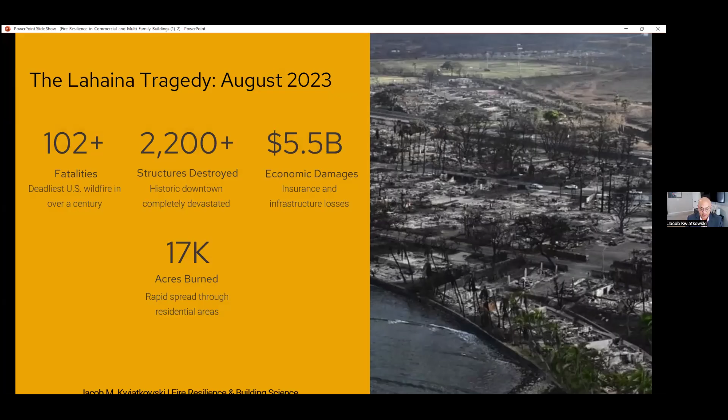One of the big things on that is, more than 90% of those homes were started from embers, and you heard about that in session one, and you're going to hear it a couple of times here in mine as well, because when you're talking about 90% of how a building ignites, that's pretty important. The lesson there in Lahaina is that urban design, material selection, and site planning are as critical to wildfire survival as any fire department is.

And we're going to get into a little bit of topography. I know the IBHS touched on this as well, but I like this particular design because it kind of shows you exactly what the issue was. And topography is big. So when you're looking at site plans for your buildings, it's going to be important. For Lahaina, the reason it burned so fast comes down to the wind and terrain. The town sits in a natural wind tunnel between mountain slopes, and during the fire, winds exceeded 60 miles per hour. The flames didn't chase the buildings, the wind actually carried the fire through them.

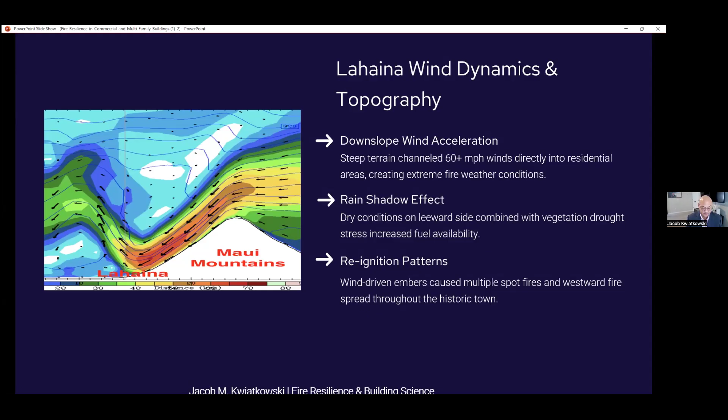Now, for architects in Oregon, you're going to want to pay attention because you have similar topography. Canyon communities in Bend, hillside housing near Ashland, and wind corridors along the Columbia Gorge. Here's a fun fact for you. For every 10-degree increase in slope, the rate of fire spread doubles. Even roof pitches can act like microslopes, drawing heat upward under overhangs. It's something to consider when you're designing the eaves and soffits, and I'm going to touch on that later in the presentation. Let's keep going.

NOAA fire weather mapping. One of the most valuable tools we have is NOAA's fire weather mapping systems. They're open source data sets that anyone in the room can access. They're not just for meteorologists or emergency managers. We use them daily, but they're there for everyone. As an architect, you can use them to make smarter siting and orientation decisions, long before the permitting starts.

Some of the ones that I recommend starting with if you're going to do some research is weather.gov/fire. That's NOAA's National Fire Weather page. It gives you daily red flag warnings, wind forecasts, relative humidity layers. NOAA also has historical model based data on spc.noaa.gov. I'll have links to these at the end so you can play with them. They're free to use. If you're in a pre-planning phase or doing site assessments, it's definitely worth a look.

Another excellent tool is the U.S. Forest Service's Wildfire Risk to Communities portal at wildfirerisk.org. You can type in a zip code or the name of a community, and you can instantly get the risk layers. It'll show you exactly what the wildfire risks are for that area, the slope, the vegetation, and the exposures. It's a really incredible resource when you're advising a client on site selection and master planning. And again, I'll have these at the end of the presentation.

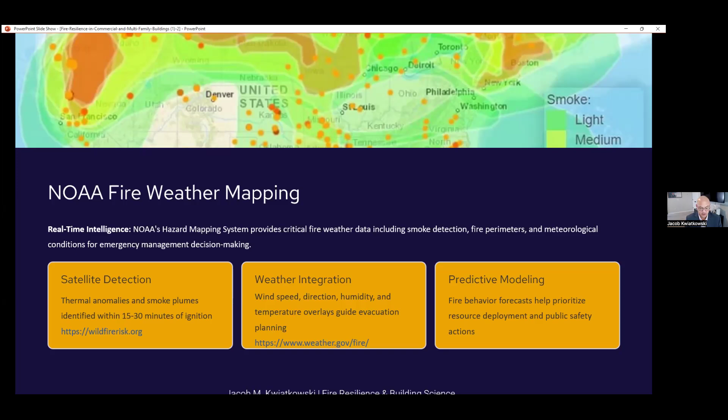And here we're going to go into some more topographical stuff. And again, this is way ahead of when you're going to be building, and this is so important to understand and try to get across. And I know IBHS did some in the last presentation, and I'm just going to keep it going too, because the slopes do matter.

When we talk about wildfire behavior, slope and wind alignment are everything. Heat rises, wind accelerates it, and narrow terrain acts like a nozzle. If a canyon points towards your project, you're designing at the mouth of that nozzle. Because of the topography, it's going to act like a little blowtorch.

It matters in building form, because embers don't care about zoning lines. They exploit every vent, joint, and underside soffit. In some of the California post-fire surveys, we found melted windows on the non-burn side of homes because that heat wrapped around under those eaves. And even though that one side of the home wasn't burned, it's still that heat traveling in that corridor that melted those windows.

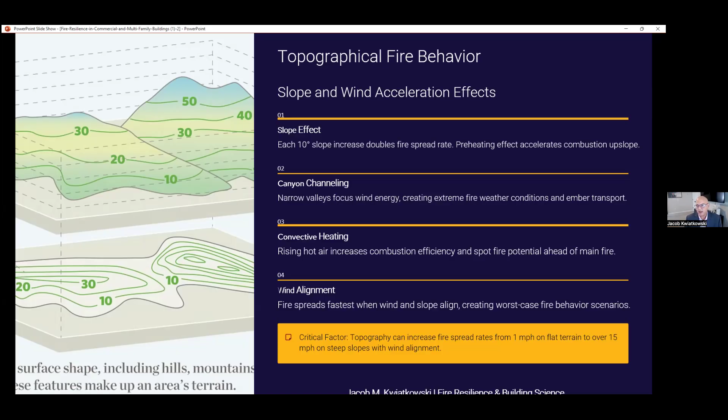So the best way I can put it for architects, and how I've phrased it when I've been working with them as an AHJ, is to think about fire paths the way you think about airflow and ventilation studies. It's the same physics, just with much higher temperatures. So that's just one of the ways I put it to my architects when I'm working with them as an AHJ, and it helps them figure that out.

So the Los Angeles wildfire cluster. You fast forward to 2025 in Los Angeles, we saw 3 simultaneous wildfires threatening multiple urban districts. The firefighters were stretched thin, meaning the first 12 hours, each building was on its own. And that's where passive protection makes the difference. That's where resilience comes into play, sustainability.

If there can't be a response guaranteed in 10 minutes, resilience has to be built into the walls, not just expected from the hydrant, because somebody has to access and get to it. If it's more than 10 minutes, the design of the building is so important. Designing with that mindset, assuming you might be your own first responder, changes how you specify materials, access roads, and defensible zones.

When I'm looking at a house or a building that's going to be designed in a wildfire area, we look at the topography, and we look at the NOAA information that we have, and as a fire marshal, try to help them make the best decision on where this is going to be located. And data is our friend. The IBHS and NOAA are such great resources for us and for you guys, and I highly recommend continuing to use them and utilize what they have to offer.

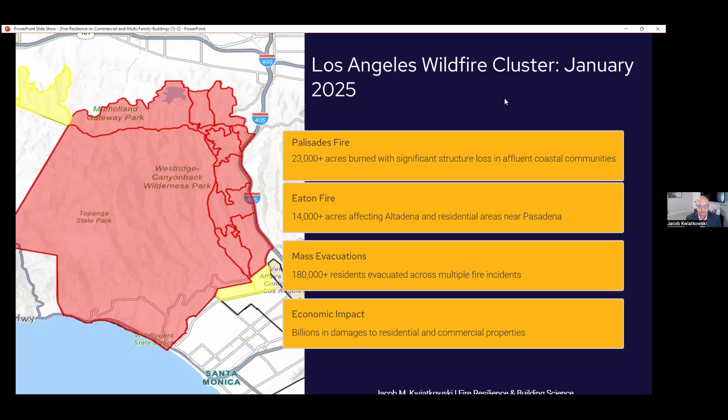Solar panels are generally made pretty fire resistant. The exception is when they're on the roof, the homeowner or business owner needs to work it into their annual SOGs or standard operating guidelines to go up there and remove debris, because the trapped debris is what's going to ignite around there. And if we have areas that firefighters can't get to under the solar panels, or we can't forward our streams that way, it's just going to end up burning and intruding and getting into the facility.

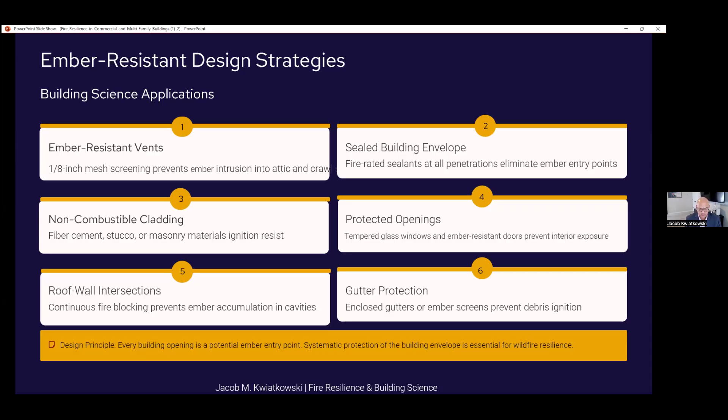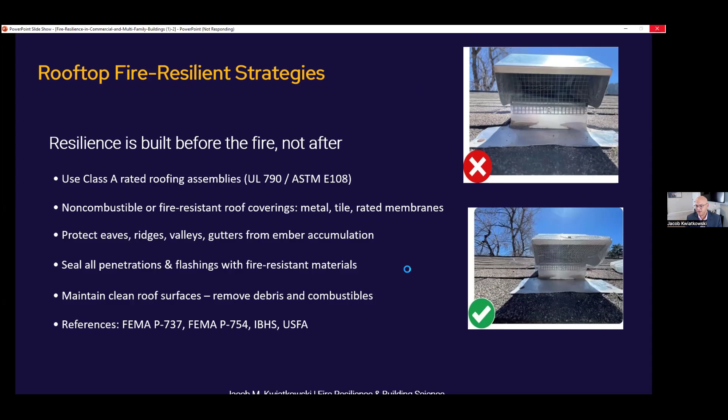All right, I'm having a little issue here. There we go. Wait, let me go back. All right, sorry. Of course my clock started running.

Rooftop detailing and vulnerability points. Flashing transitions are common ember entry points, and I'll touch a little bit more about this on the code later on in the presentation. Skylights and penetrations require sealed edges and non-combustible framing. Aluminum is the best. Some wood is okay, but if you really want to get to the Class A, it's going to be aluminum. Gutters and scuppers collect debris, which are ignition hazards.

Ember resistant vents, less than 1/8 inch mesh, baffled. And those were the vent screens in the pictures I showed you on the previous slide. For FEMA, we're always talking about short overhangs, box soffits, and non-combustible fascia. And if you go to FEMA P-737, you can see that in our publication. We just have to keep the embers out of that building. If we can be resilient and keep them out of that building, the better off the building is going to be, and your percentages of that building surviving go up.

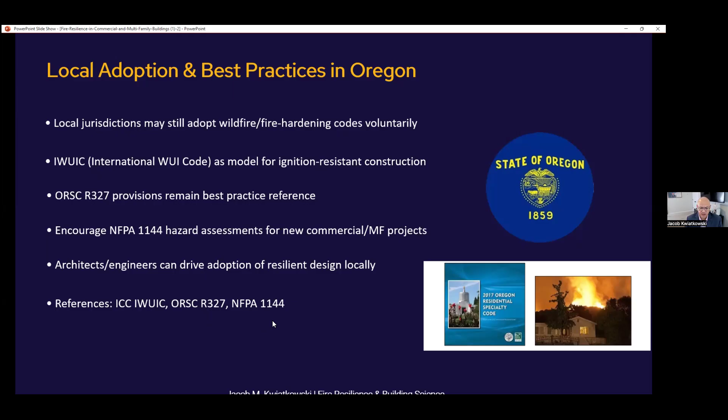And again, architects and engineers can drive the adoption of resilient design locally. If your customer is okay with you designing it to wildland fire standards, then design it to that. Going above and beyond is not a bad thing; that's actually a good thing. There are some references at the bottom here: ICC, IWUIC, the ORSC code, and NFPA 1144. You can find information on wildland fire there as well.

Here's where I can sum this up quickly when it comes to building code standards for commercial and multifamily buildings. We're going to talk about defensible space design and Zone 0 based fire protection strategy. Zone 0 is the non-combustible materials only zone. No vegetation, mulch, or flammable decorative elements. No shrubs, no mulch; you can design it to be as pretty as you can, but keep those areas 5 feet away from the building.

That is one of the most important factors: Zone 0, when you're talking about commercial buildings. When I talk to architects and designers, that's the first thing I talk about. There are areas in Tallahassee and Ocala that are large wildland fire areas, and we like them to build to this code for that reason. The less we can have burn near it, the better. So Zone 0 is by far the standard.

Then you're going to move out a little further. You'll see Zone 1, which is 5 to 30 feet, and that's your fire-resistant vegetation. Let me get rid of this here. And that's with strategic spacing and low fuel loads.

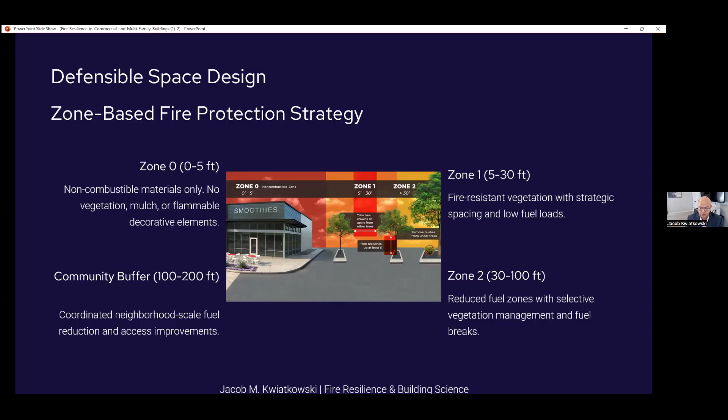All right, here's more of the zone critical requirements. The 5-foot zone non-combustibles, and we're going to be building with exterior walls classified as type 2 and type 3. They require non-combustible exterior walls constructed of brick, masonry, concrete blocks, and precast panels.

The precast panels are getting better and better every day, and they're really becoming a key player in the aspect of wildland fire and construction, because, as in the previous picture that was shown, you can make them look as decorative as possible to give that building a really good feel.

For commercial and multifamily design systems, the principles still remain the same: non-combustible balconies, back ventilated wall systems, screen mechanical intakes, and site access. And this goes back to the parking lot and the driveways to make sure that they are defensible and act as fire breaks. And this again is IBHS, and again I like to say they're amazing, and the testing that they do is phenomenal.

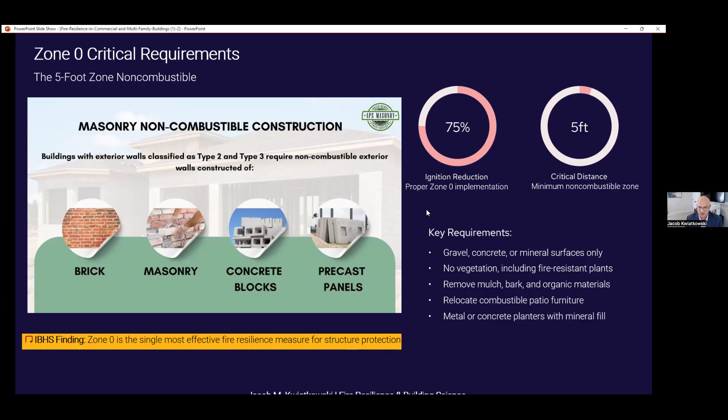Okay. So we're going to talk about multifamily building risks, balconies, and ember traps. That's what a balcony is. It's an ember trap. When the embers are blowing, and they could be blowing from a mile away, that's where they're going to go. And this particular slide is showing you the differences in how fast they heat and how fast they go.

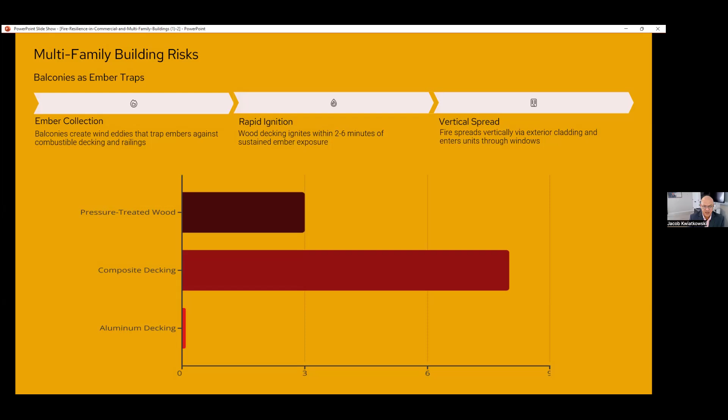So aluminum decking, non-combustible decking, is by far the best, obviously. Composite decking is your next best, and then pressure treated wood. So you're going to want to utilize those. This slide here gives you some idea of time to ignition in minutes and the burn through time in minutes. So as you see, aluminum and concrete, there is none. They prevent ignition entirely. And then traditional wood, pressure treated, and composite decking.

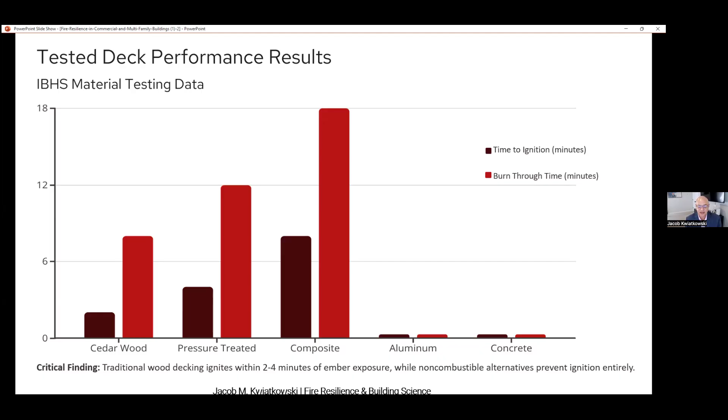You can see in composite, time to ignition is a little over 6 minutes, but the burn through time takes right at 18 minutes. Cedar is going to ignite within less than 3, and then it's going to burn through in 8. So we really want to stay away from those wood decks, because that ember gets on there. And again, like I said, it's 1400 degrees. So it's gonna make them catch quick.

So commercial and multifamily specifics, enhanced requirements, and this is for the larger buildings. We're going to touch on that balcony design, because if you're going to build in balconies, they need to be non-combustible decking and railing systems, metal or concrete construction with drainage to prevent ember accumulation. This way, if they do have a balcony, they can continuously clean it and not have any buildup.

The wall systems need to be back ventilated, and rain screens require fire blocking at each floor. Continuous insulation with mineral wool preferred for their fire blocking. HVAC intakes with ember screens for the mechanical systems. And we generally want emergency shutdown capabilities during fire weather warnings, because even if we're not having ember intrusion, if we leave the HVAC and the mechanical systems on, the smoke that's around the building is going to start flowing through, and that's going to be another dangerous hazard for life safety.

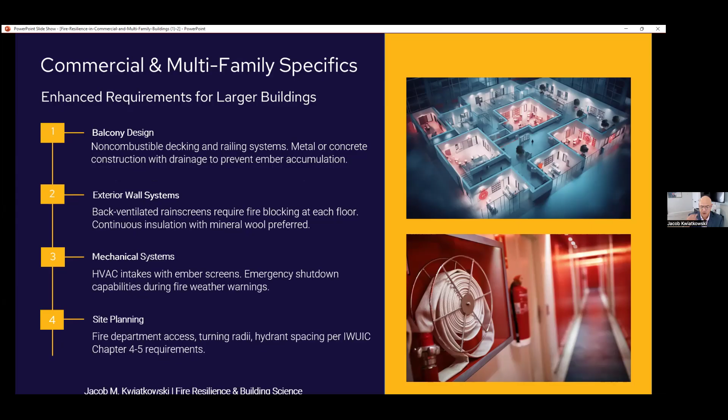Site planning. Always the site plans. This is another area where the AHJs take a big part, and that's the fire department access, the turning radius, and the hydrant spacing per IWUIC Chapter 4 and 5 requirements. And we want that spacing to be enough to where not only we can get to it, but they're enough feet apart so that they're not on top of one another.

And so we're going to come into an economic case for fire resilience, and this is what I use when I go out to communities and we're talking about bringing on building codes, and I get to sit down with the builders and have a nice, calm discussion about why resistant building codes are a necessity. And I start talking about building resilience and why building resilience is so important.

Because when I look at it, when you're talking about a 2 to 4% construction premium, but overall you're going to have a 3 to 1 cost benefit ratio. For me, that's an easy sell, because that's what you want. You not only want a building to be resilient, but you want it to last, and you want it to be a benefit when it comes to a cost ratio.

And not only that, when we're talking about wildland fire, we're talking about insurance savings. And right now, in some of the PRAs that I've done, the resiliency assessments, insurance is the player right now. It is probably one of the biggest issues, especially here in Florida, but as well now in California, and I'm certain in Oregon, in the wildland fire areas, that it's becoming an issue. These insurances, they're going up. So if you can save that money from the very beginning, even though that upfront cost might be 2 to 4% more, in the long run, you're looking at 15 to 20%.